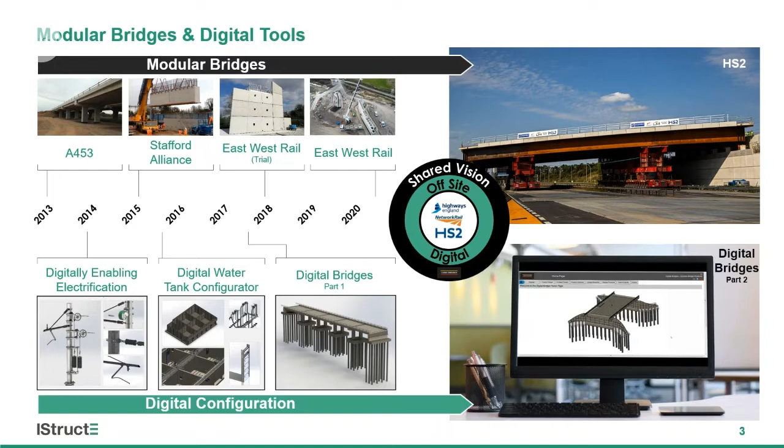I'll take you through the case studies around the products, and John will then take you through the evolution of our digital toolset, digital configuration tools. So firstly, let's start with A453.

We raised the question of how do we build these bridges using an offsite approach? How do we design the bridges so they can be manufactured and assembled efficiently and safely? We knew precast bridge beams and steel girders were already in the marketplace at the time, so we focused our attention on which other parts of the bridge structure could be manufactured offsite. We worked with Tony Gee and Partners at the time to develop solutions for the precast piers and crossheads you can see on the screen, but we also looked at solutions for offsite manufactured abutments. We developed a system which I'll hopefully be able to play a quick video to show you.

So we developed a system where we were utilising precast shells for the outer faces of the abutment. We would place those on top of the completed pile cap, where the projecting reinforcement was coming through from the starter bars. We'd then place and fix the reinforcement in the centre of the wall before placing the end closures and front face panels, so we were actually pouring an in-situ core down the centre of that wall. Each of those panels then had a joint that was sealed with a wet grout solution. That was the overall construction sequence.

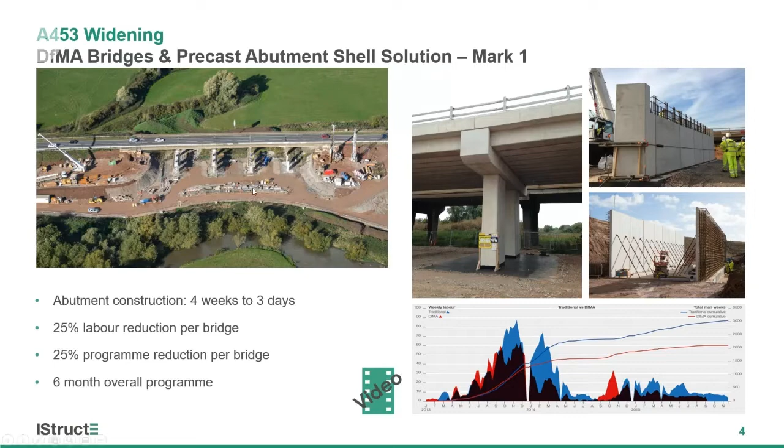So we were in a place of thinking this is going in the right direction. We then moved on to our next project, taking the lessons learned with us from the A453, and we continued to develop our abutment solutions for that project. This was working with the Stafford Alliance, which included Atkins as the designer, Network Rail, and Volker Rail for the main rail systems.

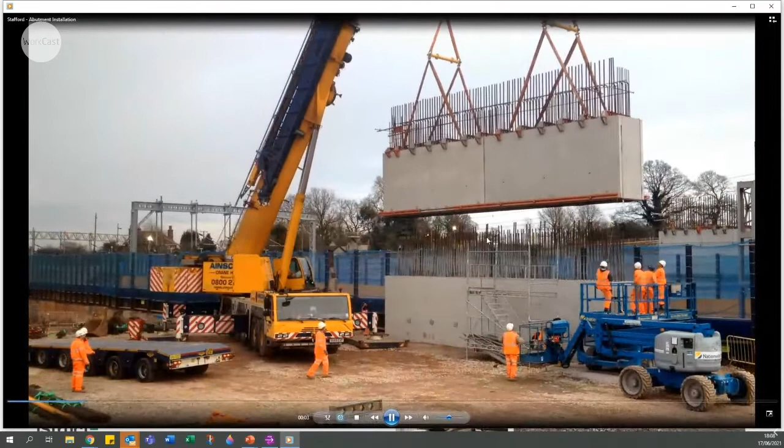We looked at how you take the methodology we developed with the precast shells and panels on the first project and turn that into something we could utilize in pre-assembly areas. So rather than bringing the actual precast panels to the work front, we brought the precast panels and reinforcement to a pre-assembly area. We pre-assembled them into a 3D module, into a lifting frame, and then lowered that into site.

Sorry, that video just clicked away. But you can see the precast shells being lowered into position. And so that was working for not only the bridges that cross the mainline railway, but also some of the smaller bridges that were involved in river diversions.

You'll see the images down the centre of the screen, in the bottom right, of one of the smaller bridges. It used exactly the same methodology, but we delivered that bridge in a week. So from completion of piles to concreting the deck, that was a week's worth of construction.

So we knew things were working at both scales, and we were onto something that was a system effectively. Interestingly, on this project, there were 6 bridges that we constructed using offsite methodology, but there were 5 bridges that, at the time when we looked at the rationale for delivering them, we decided to use a traditional approach. As it was perceived, they weren't on a critical path, and the programme benefit savings on offer for them wasn't worth going down that route.

However, things change on projects. Things don't go to plan, things move around. So suddenly those bridges did come on the critical path, and the feedback from our workforce was, why aren't we doing these in the same way as we did before? I think that was the first moment of us thinking there's a benefit to the wider application of this across a scheme as a system, and the benefits you get in reduced labour and workforce across a scheme deploying the same system. So that's the lessons learned we took away from that particular project.

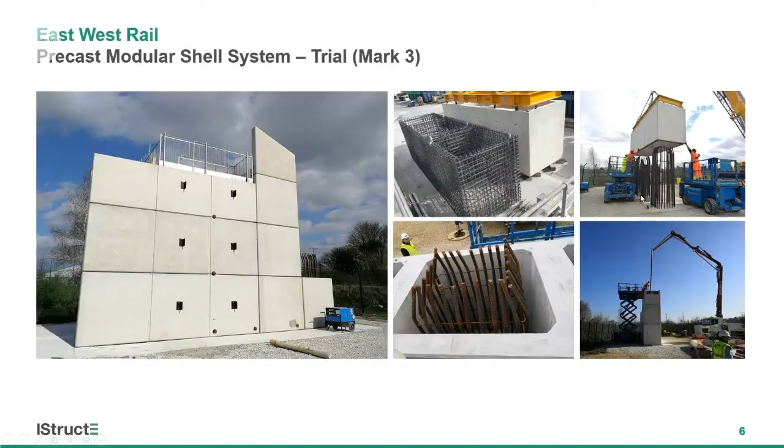So then I'm just going to go through a few slides of how that was then deployed on HS2 before I hand over to John.

Manufacturing offsite doesn't necessarily mean things are efficient to manufacture. One of the benefits of the modular system we've created is there's enough repetition across the bridges on a scheme, and the opportunity to deploy it across multiple bridges across the wider industry, that it helps to justify the investment in the manufacturing process and the molds and things. Whereas if you're just doing one-off bespoke casting, you've got a different business case to deal with.

John will talk more about how we've walked through the journey of developing products that we can then maximize the different number of configurations with a minimum number of products, to generate efficiency in standardization and manufacturing.

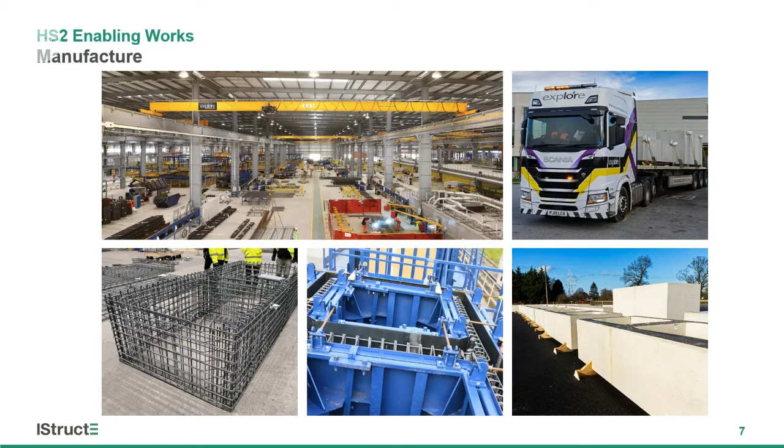Moving on to site, there's a lot of learning we've done around what level of control you need to put in place to control the tolerances of the on-site activities, which normally have a lot of play in them because a wet and cold environment can often be difficult to achieve, versus the really tightly controlled tolerances of our offsite manufactured precast components.

As part of this process, we've developed jigs and frames that allow us to control the tolerance better than would normally be achievable. That extra time on site, although it's seen as extra time you wouldn't normally spend, actually allows us to accelerate once we get out of the ground and into the assembly of the shells, and avoids clashes that would otherwise occur.

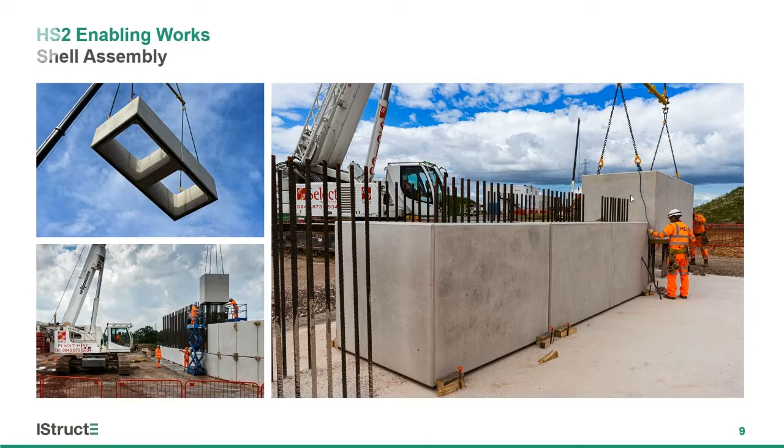Here you can see some of the shells going into place. There's a gasket on the bottom, similar to tunnel gaskets, designed to compress under the weight of the shell, so that when we pour the concrete to the full height of the abutments, we don't get grout leakage, and we also avoid follow-on activities for sealing joints with wet grout afterwards. That really releases the rapid construction assembly.

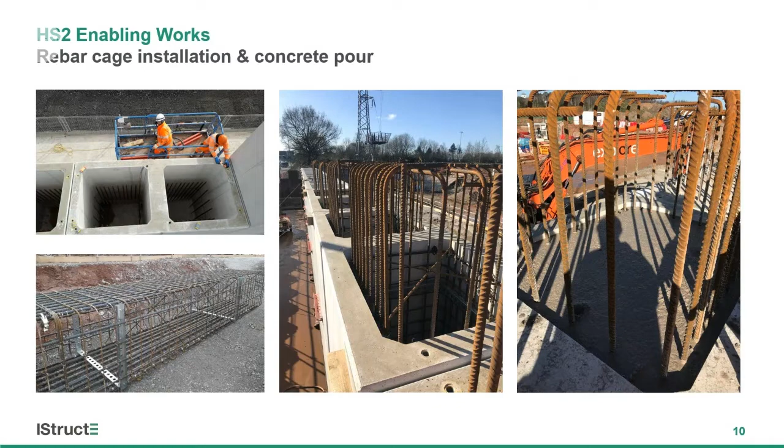Then we move on to installing the prefabricated column cages that sit within the shells, again using jigs and frames to control the tolerance so they slide inside the precast unit manufactured to a repeatable mold—so we know what the geometry is—while also avoiding clashes with the starter bars set out in the bottom, which you can see inside the shells from the pile cap. So all the time we're thinking about how to control the tolerances between our on-site and off-site activities.

Once the abutments and wing walls are complete, we've then got a connection of our L walls on top that help form the wing walls. These have been developed with a range of slopes to suit the different earthwork profiles that might be required.

Moving finally to the elements of construction still in situ, we've tried to standardize and simplify the most complex activities on site. The diaphragms themselves are normally an area with a lot of complexity, dense reinforcement, and a lot of carpentry and formwork involved. The benefit of the shells is the depth they provide, which gives us enough space to sensibly construct the diaphragm.

We've got precast fascia infills that sit between the beams to form the front face closure panel of the diaphragm for when we're pouring the concrete—you can just see the end closure on the left hand side there. Again, that takes a bit more effort in placement of the beams to make sure that when you're offering up the precast elements between them afterwards, it fits nice and snugly, without a great big joint to seal. But it can be done, and that's the sort of thinking and effort required.

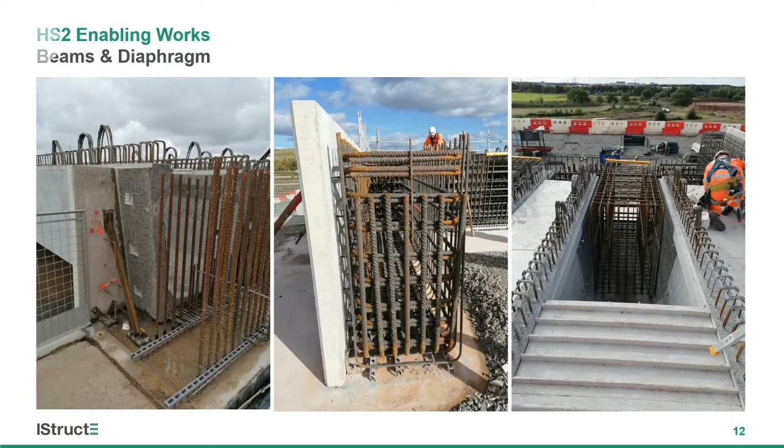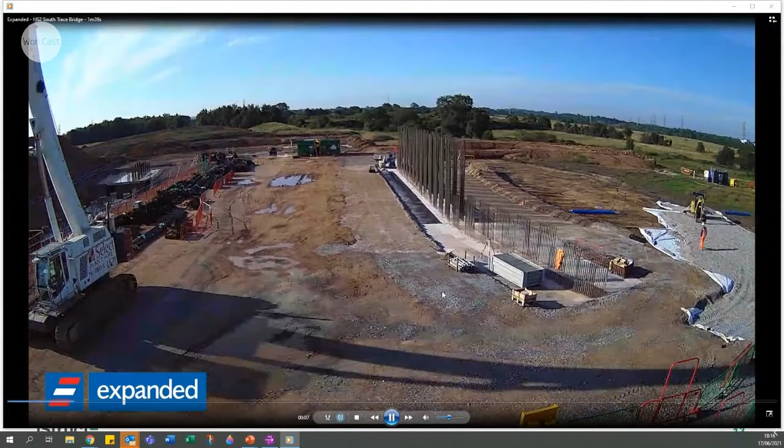And then to bring that to life, we've got a video clip of the actual abutment all coming together. So you'll see here, it's more of an assembly site, not a construction site in its traditional sense. You can see the starter bars projecting from the pile caps, and the precast elements being lowered into place.

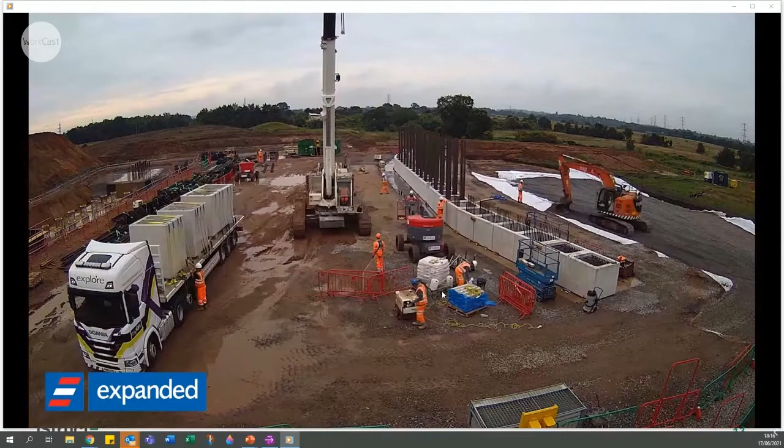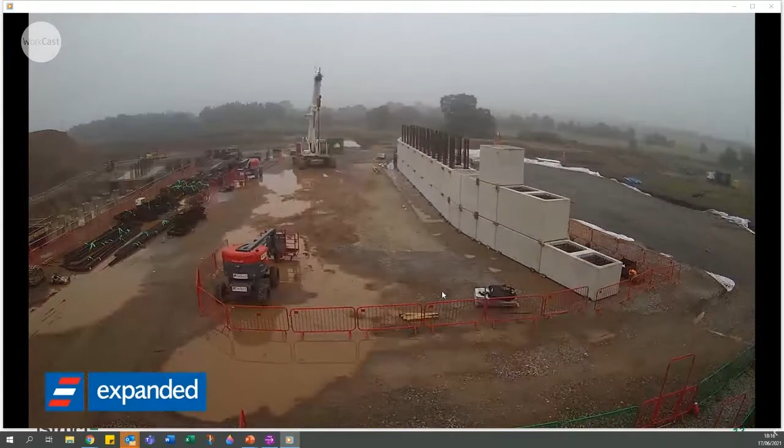There's a team of 6 that assembled this abutment. This was 400 square meters of abutment in 5 days of construction, including placing the shells, dropping the rebar cages in, and completing the in-situ concreting works. The team of 6 are multi-skilled bridge assembly teams, rather than having carpenters and steel fixers with different resource demands for each bridge, we use multi-skilled teams that can do all of the jobs rather than just their individual trades.

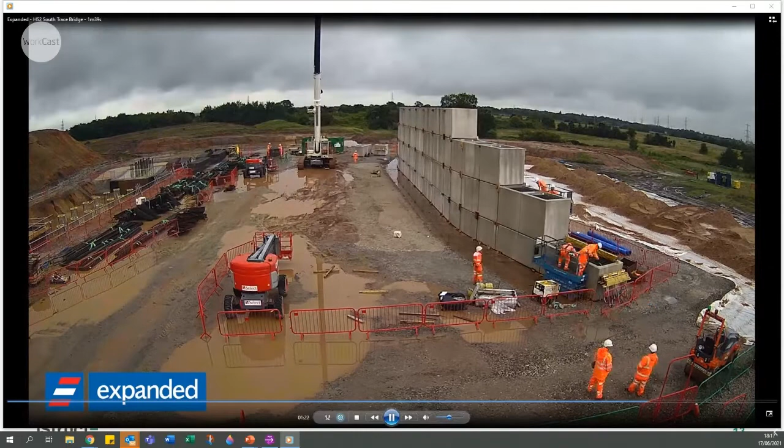You can see the cages ready to be installed and lowered into the cores, and we should eventually start to see the concrete being poured. You can see it's a relatively tidy site compared to what would normally be construction. We're able to still achieve the same rates of productivity during wet days on site as dry days. Because it's a simple, repeatable process, we can do this safely, reducing the risk of accidents.

So I'll close that, and just give you a summary of the benefits: the abutment was assembled in 1 week rather than constructed in 7. When you're working at prelims of maybe £200,000 a week or more on some of these schemes, there's potential for substantial savings across the scheme.

Overall, we're finding that compared to traditional methods, we're around 50% of the construction time for an entire bridge. There's 6 people on site for 1 week, rather than a team we estimate at 12 for 7 weeks on a traditional abutment.

We've got the benefits of fewer resources on site, fewer site cabins, setup and facilities for the team, which feeds into our carbon calculation in terms of the potential carbon saving when you're running off diesel generators with large office setups to support large teams. That's part of that carbon calculation, along with the embodied carbon within the concrete itself.

The ability to have precast shells means we can have a higher cement replacement in the in-situ core concrete, because we're not trying to get the concrete to go off quickly so we can strike the shutters and remove all the temporary works. So that's an increase in GGBS, and hopefully at some point moving towards a cement-free solution, working with client bases on what departures we need to get approved.

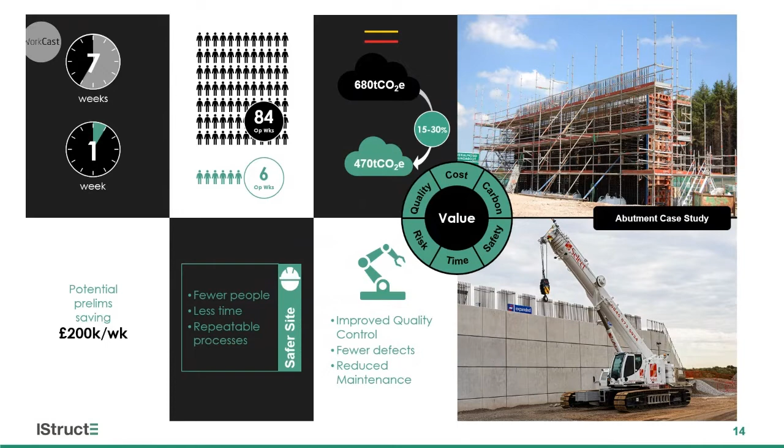Hopefully that gives you a feel for what we've developed in the product sense. And I'll now hand over to John to talk through the digital tools we've developed as a team to help drive this approach across many projects in the future to come.

Good, yeah. So one of the challenges of this type of construction at an early stage is there's quite a lot going on in terms of component selection. It's about how we assist engineers at the early feasibility stage of a project to understand whether it's feasible to go down this component, product-led approach.

About 2 years ago we started a project funded through Highways England and Innovate UK, with Laing O'Rourke and BBA for assurance, and from the design side, Ramboll and WSP working in parallel, us having been the designers on the HS2 bridges. What we're looking for here is a product-led approach, pre-approved components so there's confidence in the system, very much around engineering-driven decisions, looking for as much automation of the process as possible, generating design outputs quickly, and having design informed by cost rather than just costing the design we've got.

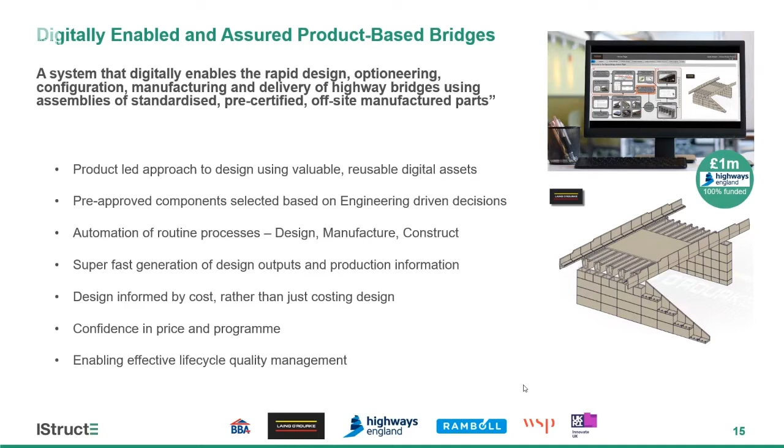So what we had to do was pick something we could limit this down to, a structural form that we knew we could do. So, leading on from HS2, we had a single span integral bridge with full height abutments, pre-stressed precast concrete beams, and the precast shells.

Through that, we're taking the process of HAPAS certification to get the assurance, which is where BBA are involved. We've got an approved installer scheme, a design guide, and an installation manual. The aim is that at the end of this process you've got design validation, a design that an engineer can be confident can be taken to the next stage and developed further at detailed design. We want a 3D model that can be used in preparing the deliverables for the scheme, an AIP and drawings, and also all the data needed for cost validation.

So where do we start on this? Well, obviously early on you've got some key decisions you need to take about constraining the extent of this task. One of the big things is getting all the experience in the room together. What was really important was to have the contractor, the designer, the precasters, and the installers all working together. From this, we had various discussions over the range of parameters we'd need to look at to get this to work.

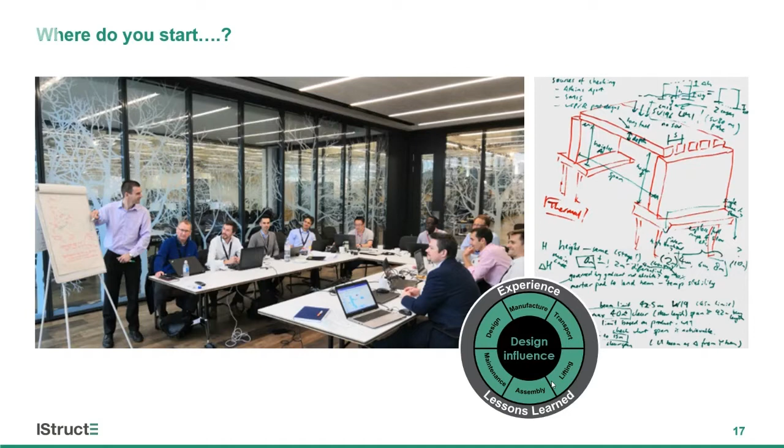We were very much aiming for realistic bridge configurations, ones reflected in the bridge stock in the UK that's going to be built in the next couple of years. Also conscious that we needed to maximise the data set we were going to achieve, but also make it achievable given run times for analysis. A big part of this was actually defining components and getting a common understanding of whether we were all talking the same language on span, abutment heights, that sort of thing.

So what we ended up doing was making engineering-based decisions, looking at this from a global perspective, but also from a local perspective. On the global perspective, we want engineers to have the confidence that if they generate a bridge configuration through this tool, it's something capable of being developed at the next stage of design. One of the problems with integral bridges is there's a lot of soil structural interaction going on - they're not easy things to design.

So what we did was look at a number of ranges here. We've got span up to 40 meters, skews up to 30 degrees, various abutment heights, and also a categorization of ground condition into hard, medium, and soft. Very basic, but at an early stage in the scheme you might only have some very basic information on ground conditions because the GI hasn't taken place yet.

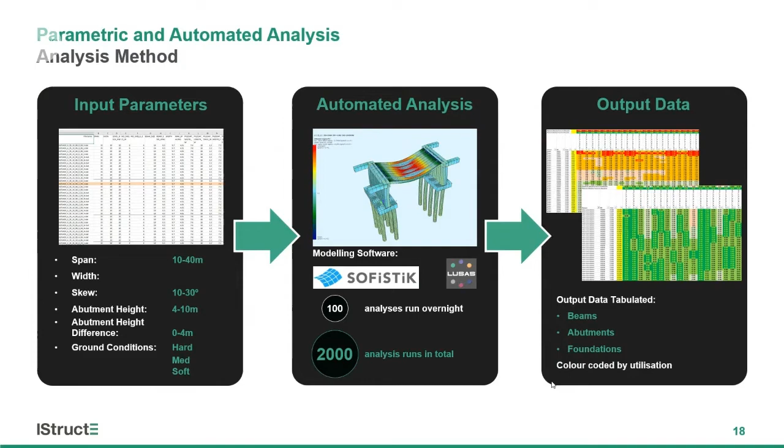We're then running multiple analyses in SOFiSTiK and LUSAS to generate the data, numerous data sets, so that an engineer can see the data relevant to the bridge they're selecting and understand how heavily the various components are being utilized. This shows the output from the SOFiSTiK model that we used. Obviously WSP used a LUSAS one in parallel so that we're cross-checking against each other.

Through here, we've got a single data file that's been used to generate what is effectively a detailed design model. But with just changing one number in the inputs, you'll then change that from a 10 degree to a 30 degree skew.

We're then selecting out the key sections which constrain the design at this point. Otherwise the runtime was going up from around 15 minutes to 4 hours, and we couldn't live with that. But from this we're generating the data we need, with a degree of confidence that later on we have run the key load cases that are going to be considered.

And one of the other things we wanted to do through this was actually calibrate what we were doing against the HS2 bridge that Phil showed earlier.

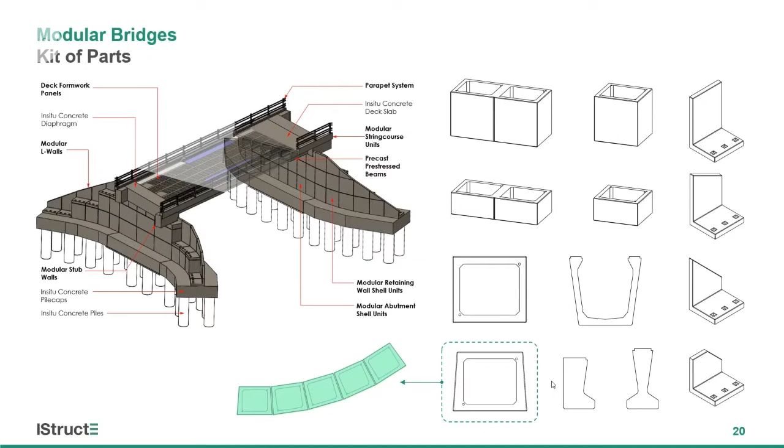We're then looking at assembling all the product components into the configurations, and again we're looking to maximize the number of configurations, but with a minimum number of products. You can see in green at the bottom, there's quite a useful component there that can be used to put a curve into the wing walls, which is quite nice, but was also very important for us on HS2 to get an angle of 15 degrees back for the train impact case.

What comes out the back of that is a design guide, which is intended to be used by experienced bridge engineers, but to answer those questions that people would have using the system.

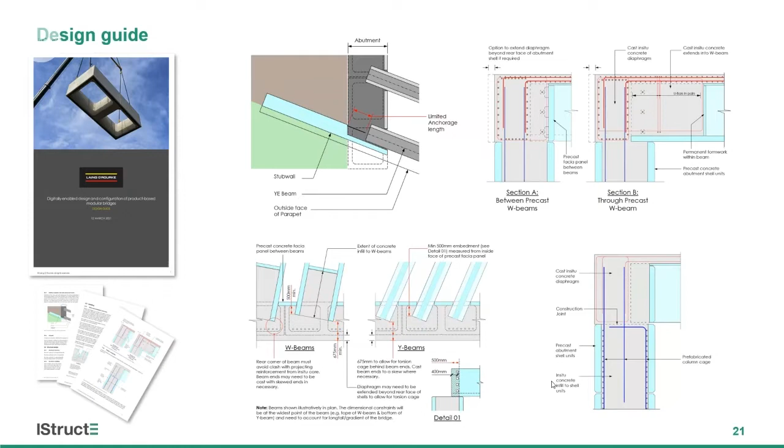Into this we had a lot of decisions around the local rules. How much should beams be embedded into the abutments? How long should a stub wall be to enable you to pick up the ground lines and carry the loading from both parapet impacts and also the integral bridge pressures on a skewed structure? So a lot of rules were generated through that.

And then finally, to input into the configuration tool, we need to again define clearly the data that we're looking for. So we've got a data input sheet that actually enables someone to list out the parameters they want looked at for a particular bridge structure - heights, abutment types, and that sort of thing.

So finally we end up with a configured model, as you can see on the left, which is a 3D model that can be exported out to IFC. That's developed - the Laing O'Rourke team have done that using a SolidWorks-based platform. And that exports out to a drawing at the top, which can be used as the basis for an AIP drawing or an options report.

It does actually generate a template AIP as well with the key data and key analysis methodology already imported into that, and also there's a set of cost data.

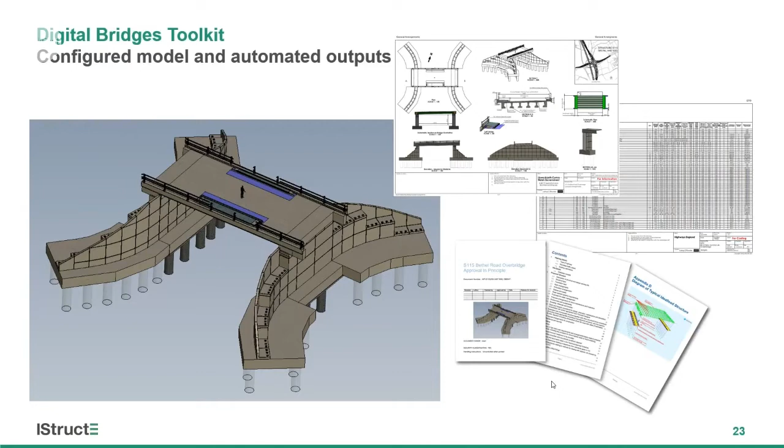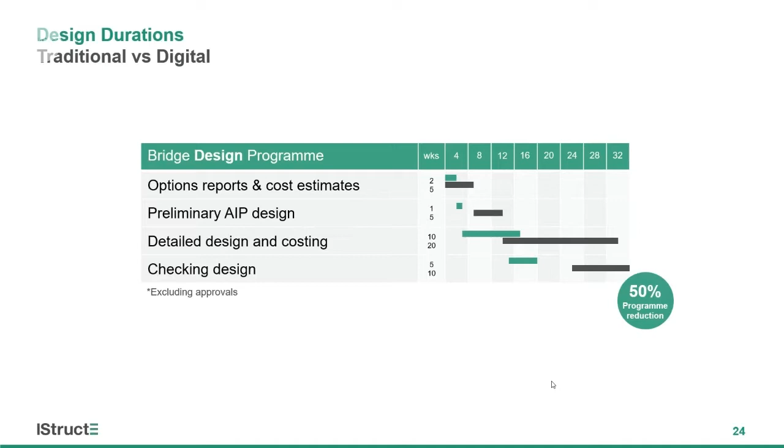And finally, on to design program. We're anticipating some quite significant savings in design for this, not least through the use of more standard analysis models, but also just from the common process, common methods of detailing, common methods of doing things, and that should yield a good process.

And so we just do a final comparison of traditional against product-led. One of the issues we've seen on the traditional process is you try and shoehorn modularization into the process at a later stage - it's quite difficult to do that. You're very often too far down the line to make the best use of the components.

Whereas if you take the product-led approach at the start of design and then understand how you can then adapt that, we can have different spans, different skews, but we can use the components to generate different structures. We can then select how that works.

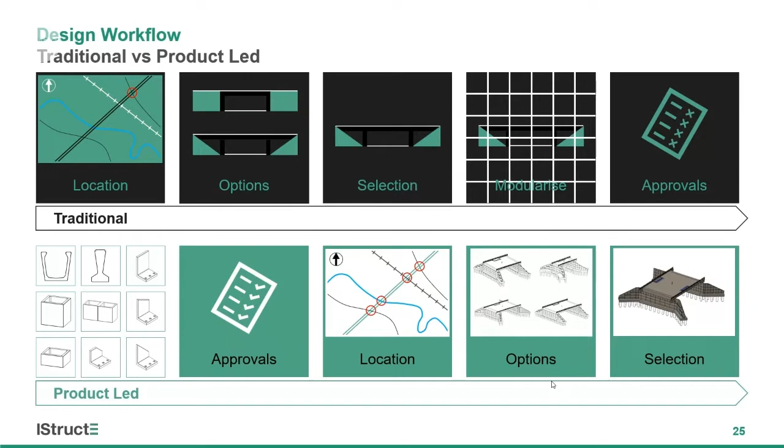And I think Phil's got a short video just to show - it's about 2 minutes - just to show the process, if that's okay. Yeah, right. So just to finish on.

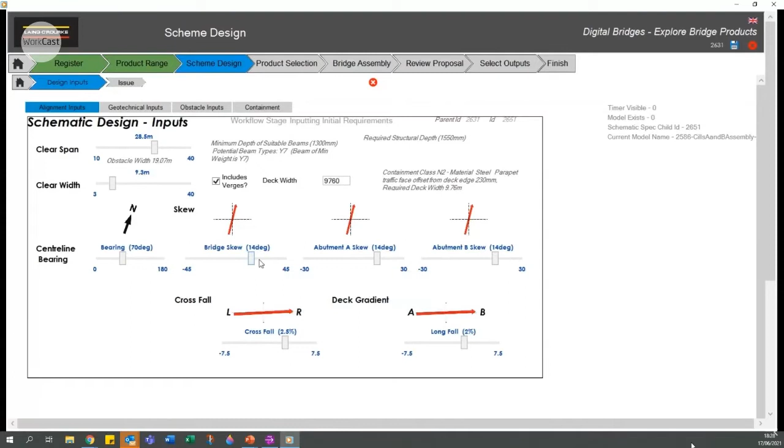So this is basically a speeded up run through of inputting information into the tool. So providing your information about who you are and what project it is, providing things around the geometry of the bridge in terms of skews and spans, looking at the obstacle and what you're trying to cross and the relationship with the bridge to it, and then getting an output to just check that you've input that information correctly and you've interpreted the drop downs correctly, so you're seeing what you're configuring.

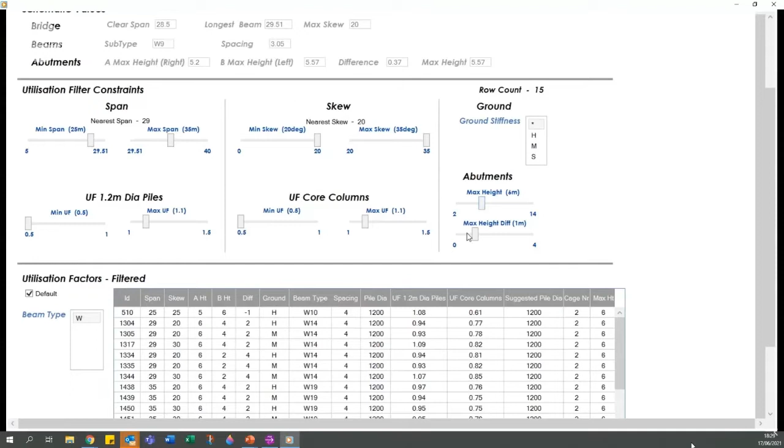Then selecting beams, then getting feedback on how hard the structure's working. Like John said, those 2,000 bits of data in there can be filtered to then see which is the closest fit to your bridge and see how hard it's working.

Again, the level of detail building all the time. Then we're just checking to see that information's come through from the schematic stage of decisions before we start loading in the actual components into the model.

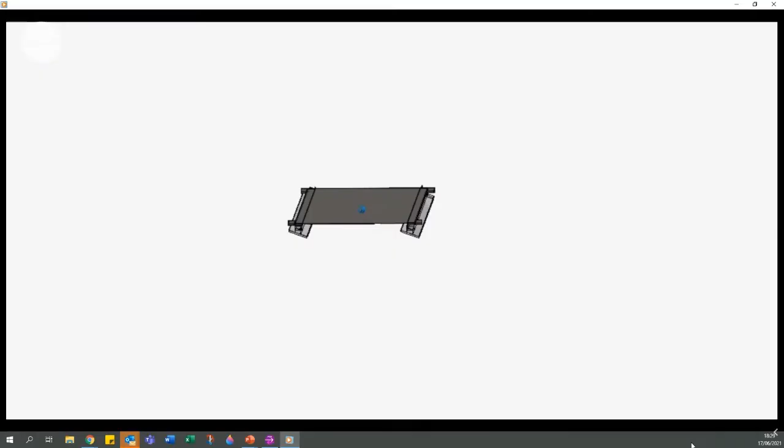So we can see, rather than just being the space savers, we're now starting to bring in the actual deck. We're bringing in the beams themselves and the diaphragm. It's a view here showing the beams with the infill concrete at the ends, the permanent formwork in between the beams.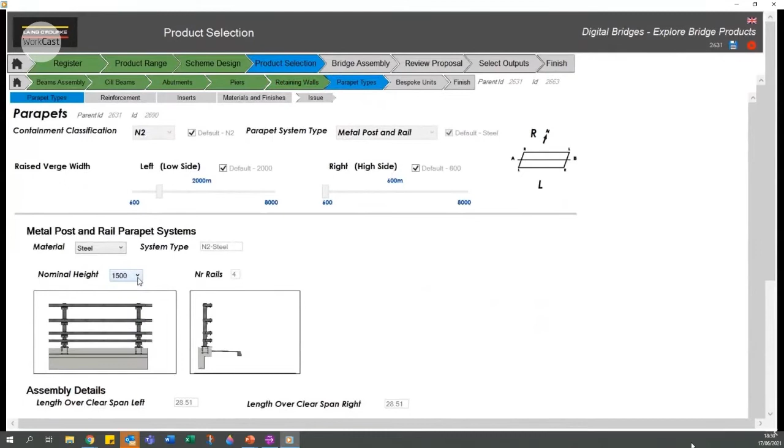And then similarly, again, making decisions about foundation layouts and the requirements for parapets and different heights of parapet or different containment requirements, before we then get to a completed bridge, automated from the decisions that we've made within the tool.

So really quick run through. I appreciate that's a quick fly through, but you can see that the level of detail within the model is not just an IFC sort of volumetric model. It's right down to nuts and bolts level of detail.

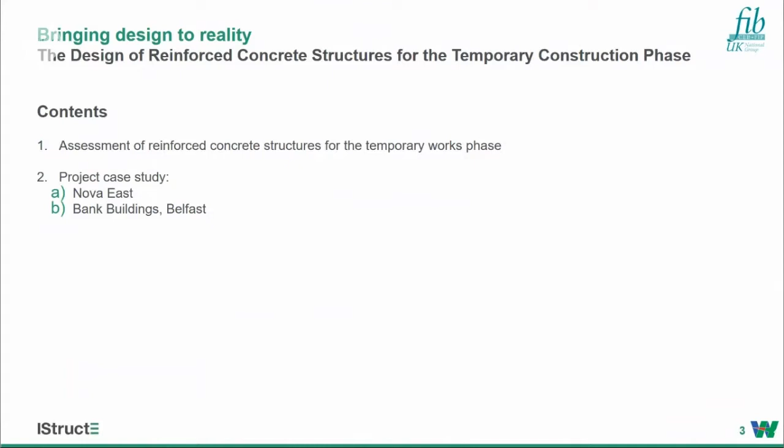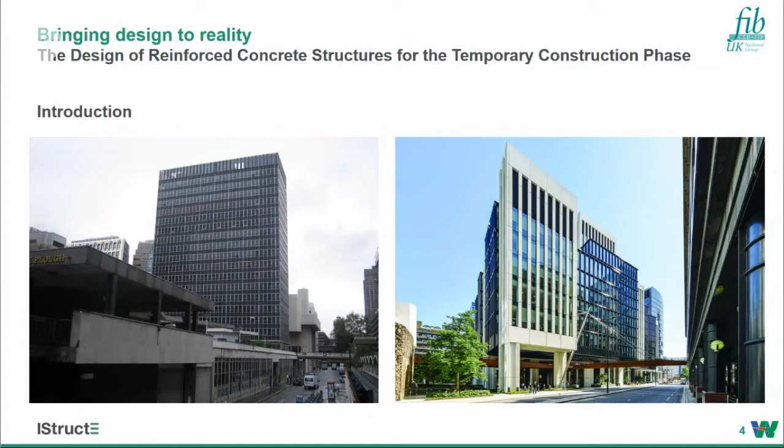That just gives you an example of what we generally see more and more, whether it be demolition or partially restrained structures - we see that more commonly in everyday life. More and more projects involve a lot of basement excavations, which will allow the superstructure to follow through.

So almost starting at the beginning of any project with regards to demolition, one of the first temporary works you come across is floor load tests. Whilst we ask for investigations to be carried out on site to verify thicknesses of the slabs and the reinforcement content, what you generally find quite hard to prove is the bending and shear capacities of the slabs, proving it to a capacity that allows you to put a substantial size excavator on top, which helps with your programme in terms of demolition.

So one of the first things we normally do is floor load tests, where you take a typical bay and test it to certain loads of machines that will be used, to determine its behaviour. One of the quite significant challenges and main things to be mindful of is flat slabs that you generally come across. So I'd always advise doing calculations to justify that and generally propping those areas before any load testing.

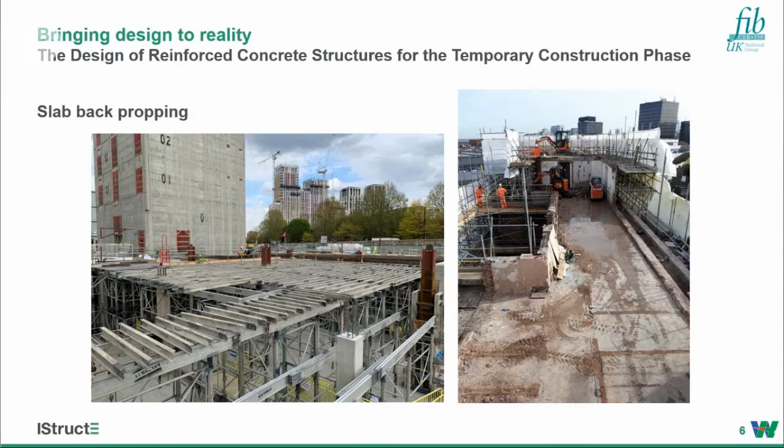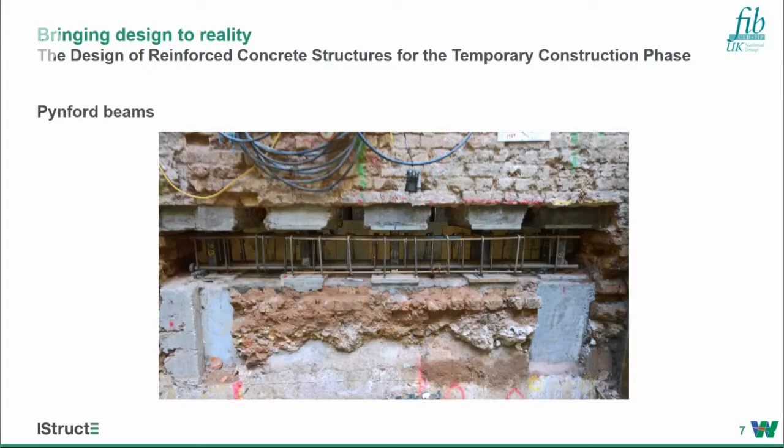Generally, when the existing building is demolished, especially in and around London, there's quite a lot of buildings which contain a single-story basement. Other temporary works elements you come across are propping of the existing basement walls - depending on what the new structure is or the scope of works, you either generally prop down onto the B1 slab, or if there's follow-on works for the piling contractor to install a new secant or contiguous box, they're founded onto thrust blocks.

Moving on throughout that project life cycle, it's not uncommon to find a new basement within an existing basement. There are several ways these can be constructed - whether you look at bottom up basement construction, where secant or contiguous piles are installed, and effectively trying to get those designed for that temporary condition, allowing you to prop at the top of the cap and beam, so you're getting that permanent works cap and beam acting in temporary conditions to allow it to span between props.

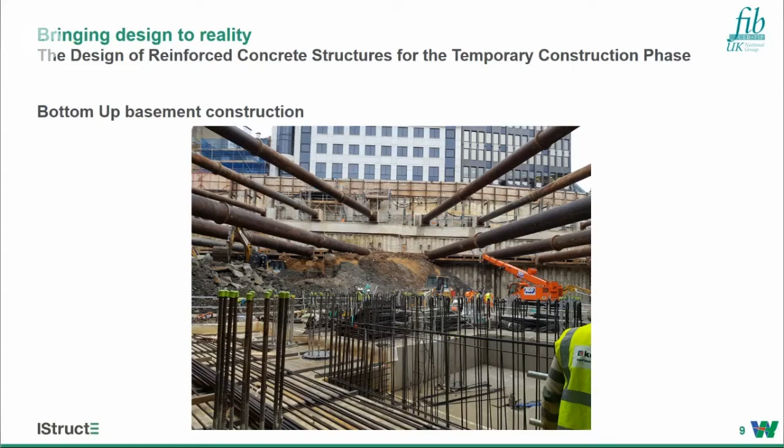What's quite useful as well is to form blisters and corbels above cap beams, which allows the permanent slab to be cast up against the cap beam, and then you allow your props to be removed after, which aids the removal of the prop sequence. When you design those contiguous and secant piles, you design them for that temporary phase, to allow them to excavate down to B2, or whether you have to introduce intermediate propping throughout.

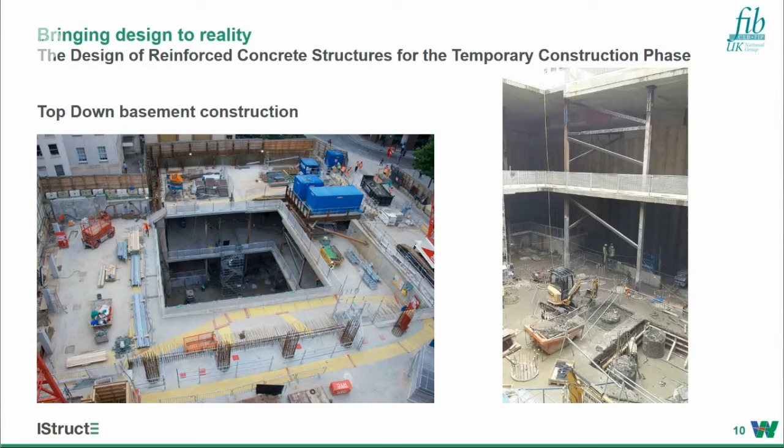It's not uncommon to use these permanent slabs as gantries, really. Depending on the basement excavation phase, as you get down to your new B2 or B3, one good thing that a lot of contractors like to do as early as possible is erect the tower crane, which can help move material in and around site. So it's about how much of that new basement slab needs to be constructed and what additional reinforcement is required in that area, just to allow your tower crane to be constructed, which is very useful to get your project going.

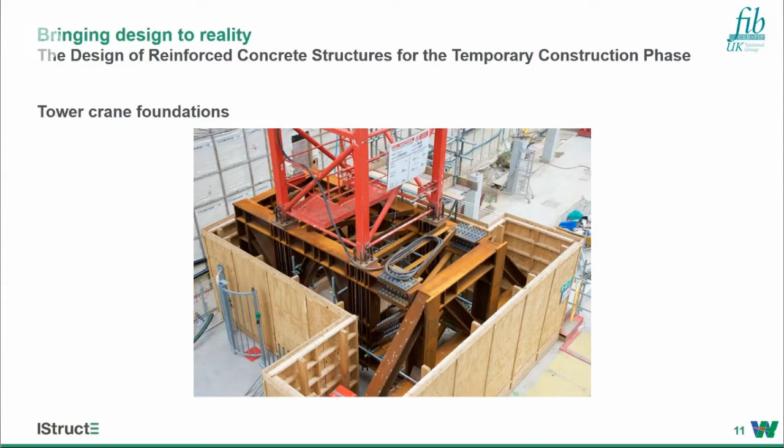Once you're down and building out the ground, getting your superstructure out, you look at the general core stability, whether in the form of slip form and jump forms, generally assessing these in the temporary condition, because in the permanent condition these cores are all supported by the slabs at all the different levels. Depending on the height of the new building, it's how much of the core can be constructed in advance of lobby slabs or permanent slabs joining into the new core. And what you generally see is another tower crane erected on top of the core, so it's checking that in the whole temporary condition.

So what I'll do now is pass you on to my colleague Ioannis, and he'll take you through a couple of case studies of these being in application.

Good afternoon, all. So we will move from the general view of temporary works to more specific cases. One case is the Nova East project, where we, along with house partners, were the temporary works designers for Keltbray, which was the contractor of the early stages.

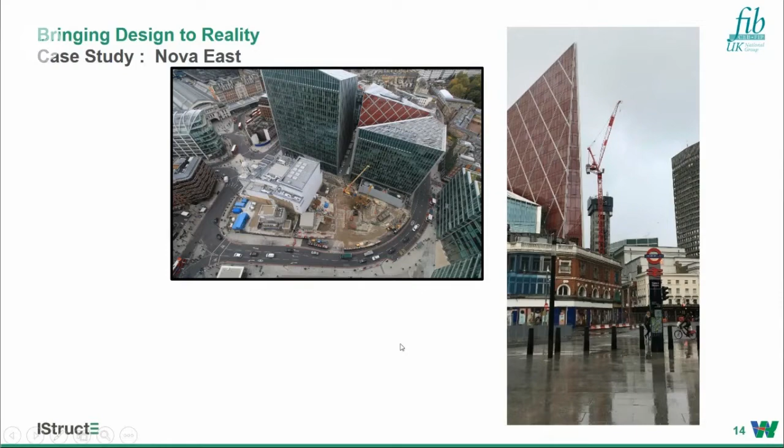This is our team here. The place is just south of Buckingham Palace, near Victoria Palace Theatre. We can see that the specifics of this plot is that it was a very congested plot, and had a lot of underlying LUL and Thames Water assets.

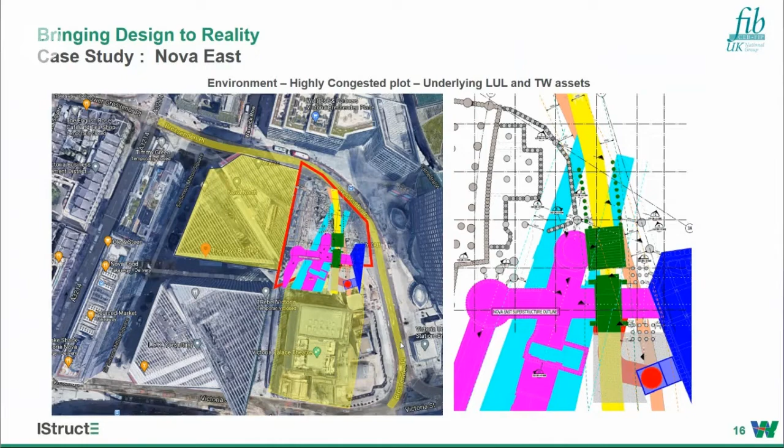So they had the King's Scholars' Pond sewer, for example, passing through. All of the permanent work was designed around the underlying assets, and this was the main constraint of building up the building. So just to have an idea of the underlying assets that were the constraints of the site.

The building is an 18-story building overlying 3 basement floors, and it was built around the underlying assets. The main characteristic of the building was that a large part of it was supported on these capping beams, and there was a very big pile cap that was actually cantilevering to support essentially the complete building.

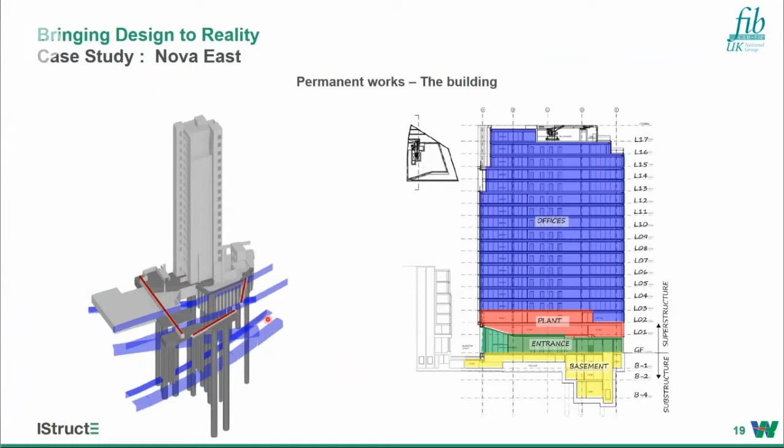So in plan, we had a partial deep basement. The rest of the building had a more shallow basement, and that is the basement 1 level, which is almost in the middle of the excavation.

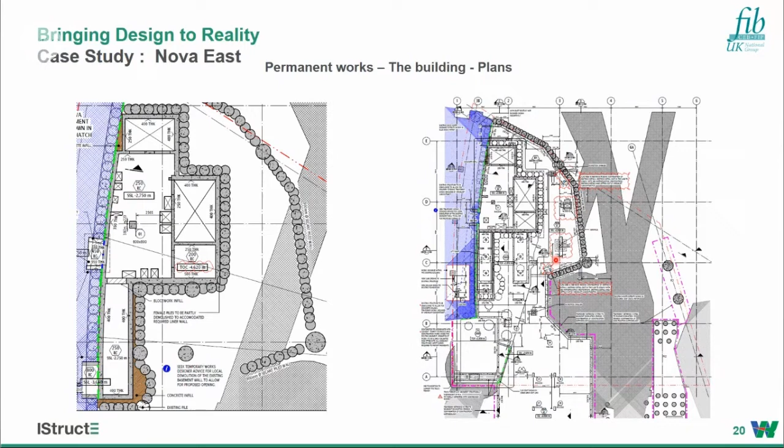So just an overview of the elements that in a typical project we would design, considering the construction element - the permanent construction elements that have to be designed also have to be checked for the temporary case. This includes the bearing piles and the retaining wall piles.

In that case, the pile cantilever slab, the capping beam, the first level retaining props, the capping beam at the lower level, the second level retaining props. There was an excavation gantry. All of these are putting the permanent works in different load cases.

The construction of the temporary case of the pile cap with the tower crane on top, bearing piles, another pile cap. Then, of course, is the 75-meter high core stability with a tower crane on top of it, and then all the excavation and enabling works to enable the construction of the shallow basement.

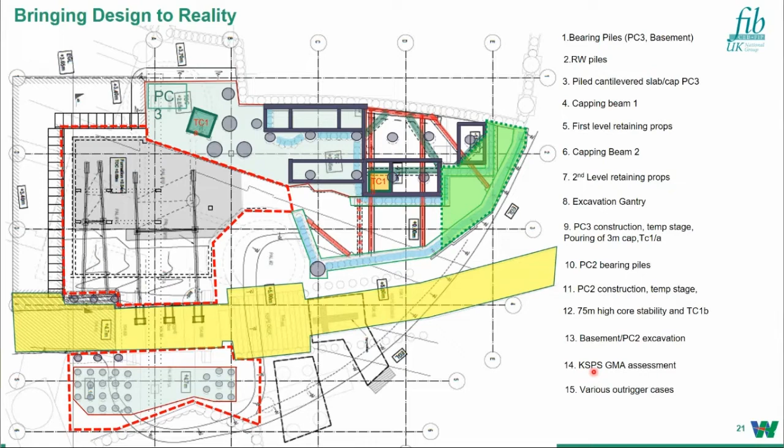Of course, all of this has to come along with an assessment of the KSPS sewer that is affected by the construction sequence of all these assets, and various outrigger cases to facilitate the construction. So we will see 4 of those designs a little bit more detailed.

So the pile cap 3, which was named for the specific project, had 2 cases in plan. The first part was going to be cast, and then the second one, the tower crane would be on top. So in the first stage, the tower crane had to be fully functioning, and because of the nature of the pile cap, this was designed to be a 3-meter deep cantilever pile cap.

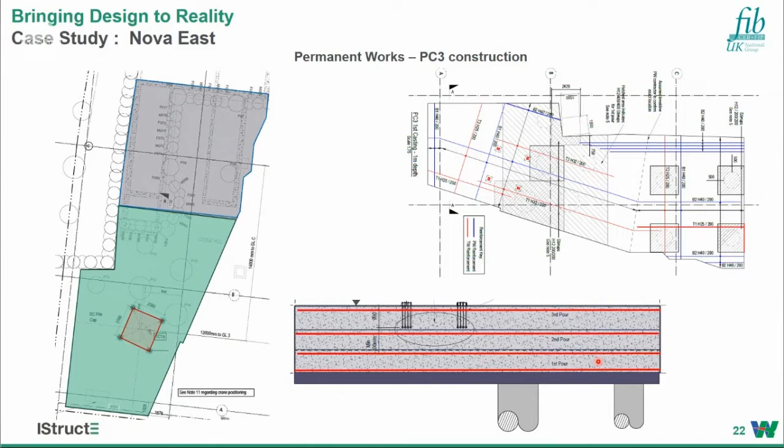So there are specific aspects that are included in this case, for example, the sequence of the pour. You need to design the temporary case for the 3 different pours. So in each of these stages, separate temporary works and separate temporary reinforcement have to be designed for the functionality of the pile cap.

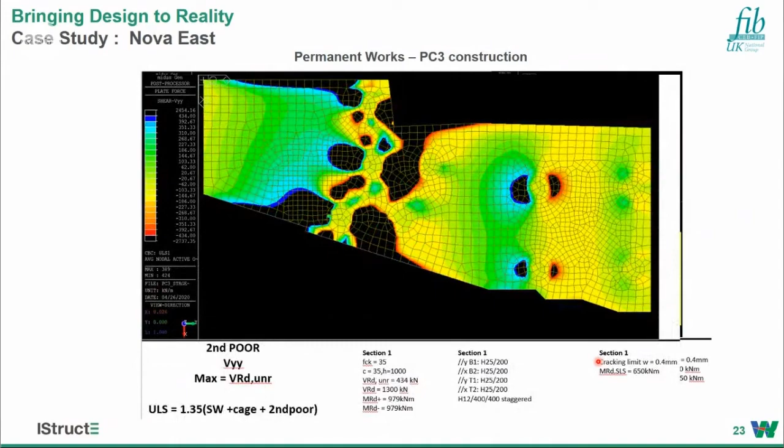And then we put on top the tower crane that started to service the site. Of course, we designed all of this in all the stages that were involved, against cracking, shear, and moment.

Another specific problem that arises in such structures is the stability of the cage, which is also a high risk element. So in this particular construction, we had to deliver detailed designs of the cage, as we had 12 layers of reinforcement on the top. We went down to the detailed design of the tie detail option, and of course we designed the cage for stability.

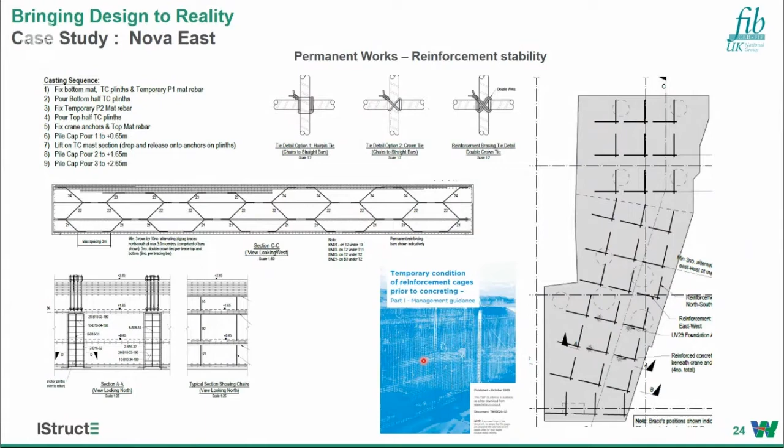Because that was going to be built completely from the top, rising 3 meters high, it also had a lot of hazards and health and safety issues. The temporary condition for the reinforcement cage - the Temporary Works Forum has been issuing some guidance, which you might want to have a look into.

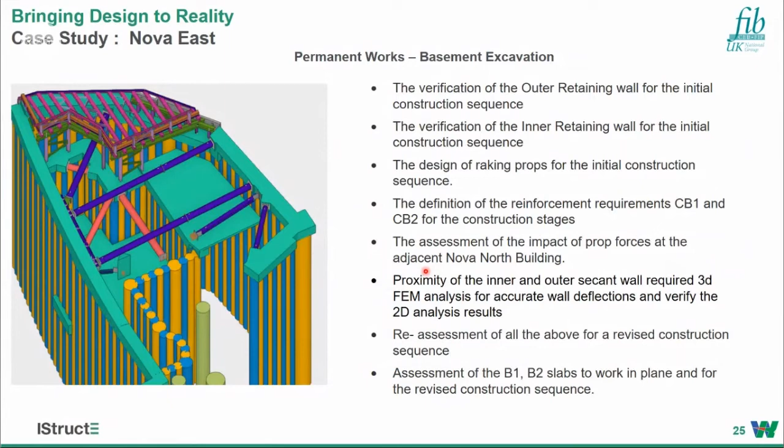The permanent works, of course, the basement excavation. You can see here on the left the complexity of the basement during construction and the temporary case. A typical sequence in this case was installation of the piles, excavation, installation of the first strut, further excavation, installation of the second strut against the second level capping beam, then down to the formation level, and then construction of the permanent works.

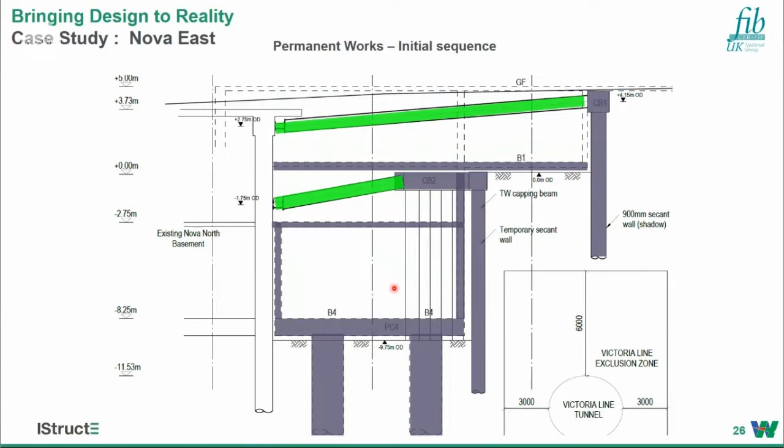So in this case, the initial design was to install the B1 slab, basement 1 slab, before removing the strut below that, which changed eventually.

Of course, we considered all the interaction of the soil and the structure, and we had some alluvium at the high levels, which is quite an onerous condition, and all the deflections had to be limited to 0.2% according to the specifications.

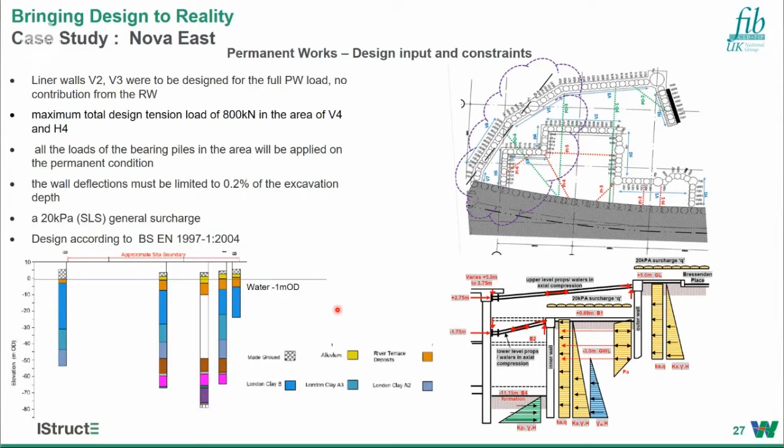In most of these cases, we design for at least 20 kPa general surcharge to accommodate the plant working on the side of the excavation. We checked the design in 2D and 3D to have as exact as possible deflection assessments and total displacements. And then, as almost always happens, construction sequences change, as I told you before.

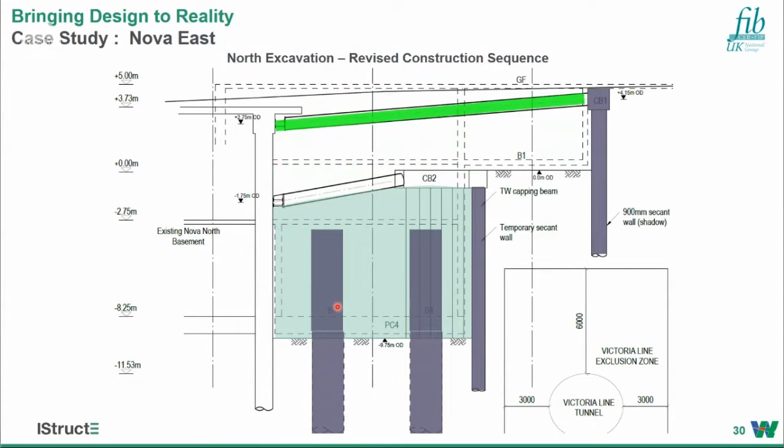The contractor decided, because there was a health and safety issue of hot works in a confined area, to remove the props and change the construction sequence, requesting from us to evaluate the condition of removing the strut just after the B2 slab.

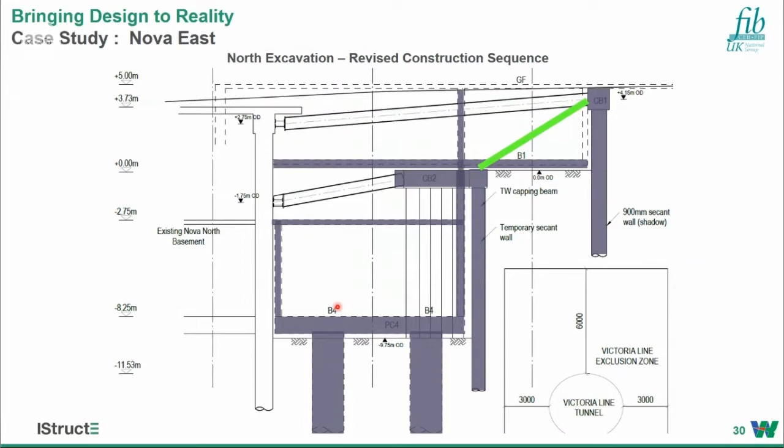That changed a lot the sequence and the conditions and the loads that the permanent works were to be exerted in the temporary condition, so we had to model the complete structure in order to evaluate if the two slabs for those cases can work as a strut in plan, and transfer the loads safely while being maintained within the specification and the requirements.

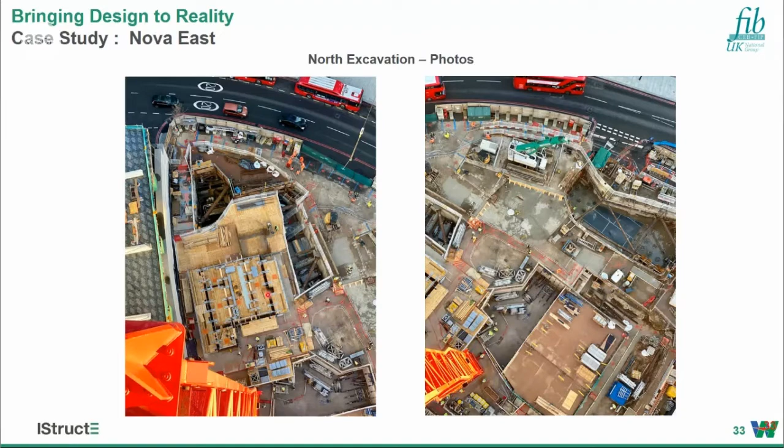Of course, we did the analysis and assessment of the in-plane compression stresses, and that is an overview of the site with the construction, showing the start of the construction of the core. Here is a picture of the site with the gantry, and the core has just started.

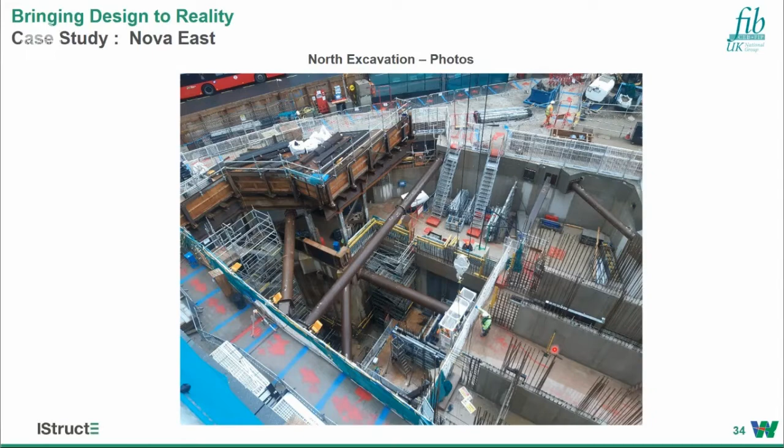Half of the core is going into the deep basement, and the rest of the core is founded on top of the big pile cap. The core assessment - the temporary stability of the core - is always a consideration in this kind of structure.

Just to give an overview of the problem we have in these cases: for this specific core, it's a 75-meter core. It has to stay 6 months without the surrounding framework advancing, because then the second contractor will have to come and build up the steel framework.

The core should be designed also to accommodate the full working tower crane on top, and it will be constructed with slipform formwork, and the slipform would have to advance 6 floors ahead of the construction of the lobby slabs, which is always the case. Of course, there are design assumptions and ULS and SLS check requirements according to the Eurocodes and the serviceability control checks.

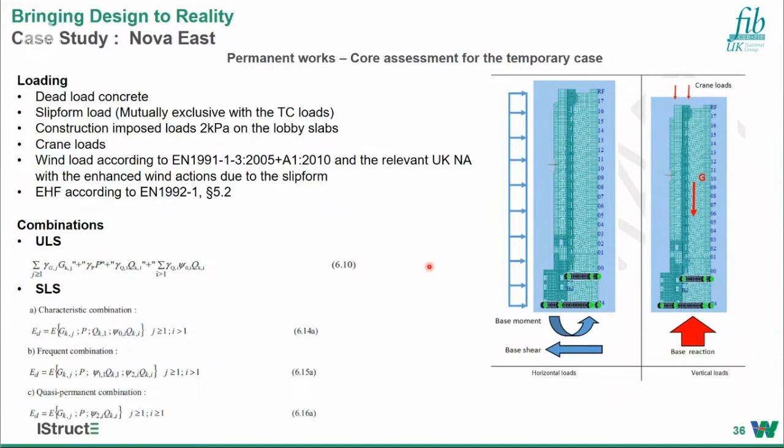The loading, if we break it down in those cases, you usually have the dead load, the slipform load which is mutually exclusive with the tower crane loads, the construction loads imposed on the lobby slabs once these are constructed, the crane loads, the wind loads, and of course the equivalent horizontal loads. These are also applied to the core at different construction stages that have to be evaluated.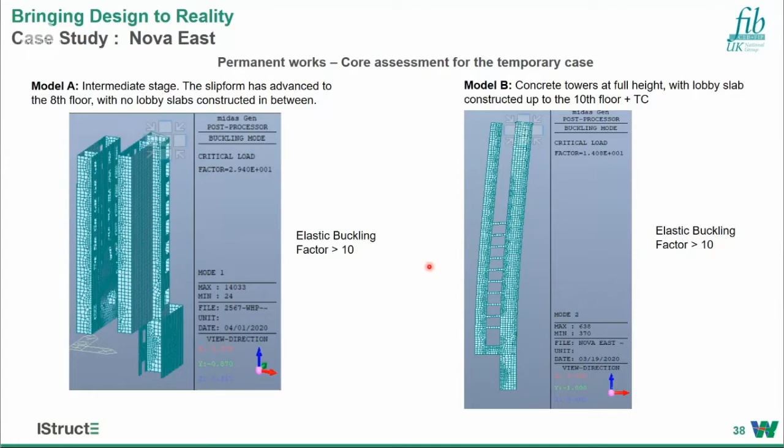So we apply the loads for different cases, and we need also to assess the core in terms of buckling for the two intermediate stages, because the contractor prefers the lobby slabs, and it's almost the case that the lobby slabs are following the advancing of the slip form, which is much faster. Full analysis on the core in order to evaluate and design the temporary reinforcement requirements for those cases.

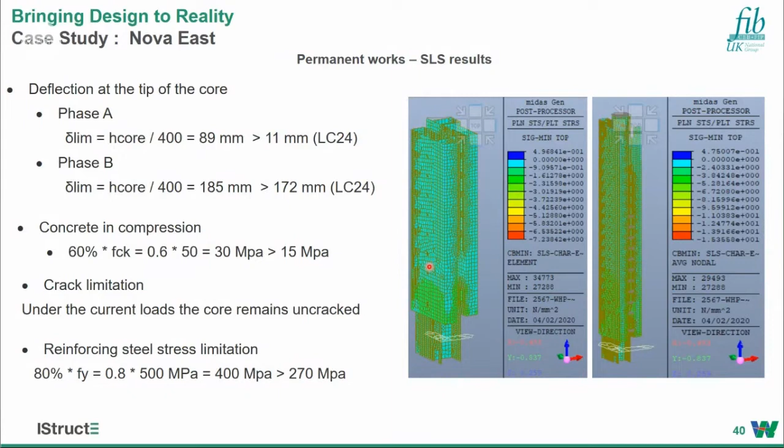Of course, evaluation of the serviceability results and the deflection, the concrete in compression, and the crack limitation that was defined by the permanent works designer. This is an overview of the core.

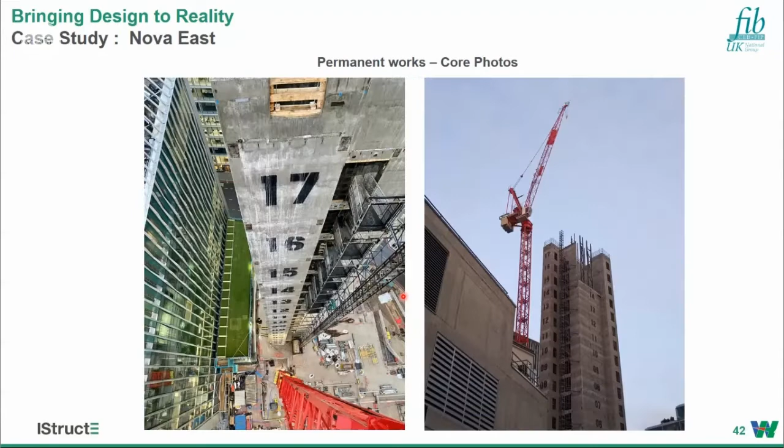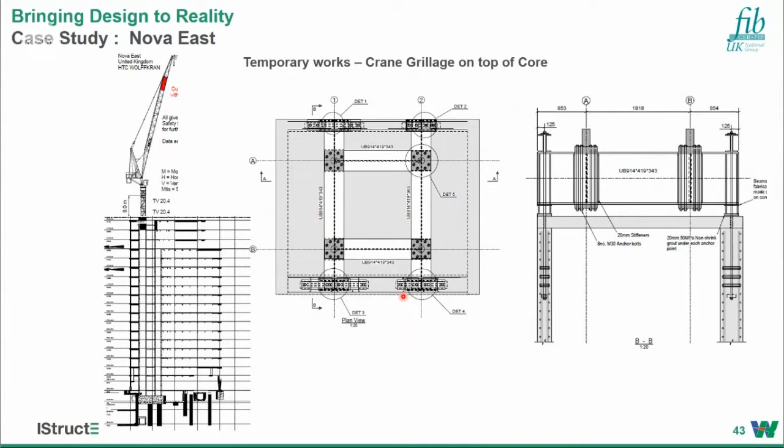Just before we had the tower crane on the top, which is a special case. The tower crane on the top is something common for high-rise buildings. You can have assemblies with 8 or 4 supports on the core. For the design of this type of structure, someone can use the CIRIA 761 guide, which is the tower crane foundation and tie design. It has examples for these cases.

Of course, the worst load cases come from a 360 degrees problem. Apart from the design of the main steel members and the connections, what is of interest in our presentation is the connection design to the core, which in that case, a special requirement was made for the precast core cap to be in place before the installation of the temporary crane. That, of course, increased the upstand distance here, which makes things a little bit more onerous.

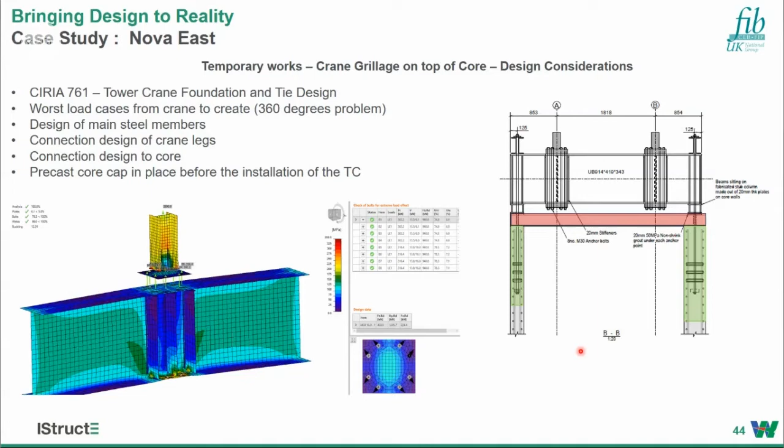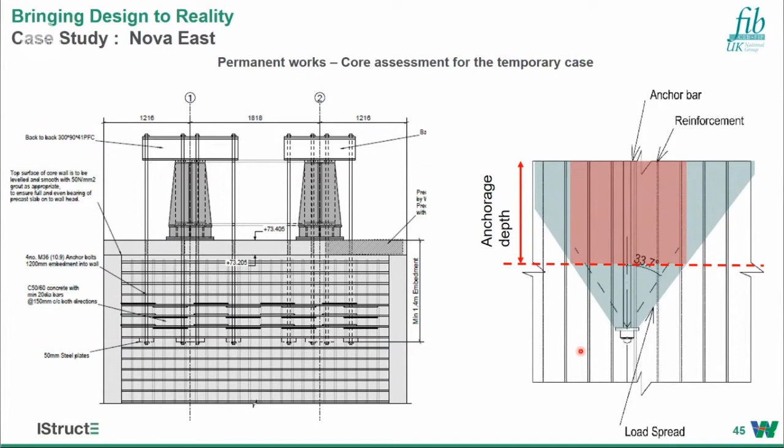In that case, we designed the tower crane anchor to transfer the load through lapping on the existing reinforcement of the core at the top. Therefore, the reinforcement of the core at the top, the crown if we can say it like that, has to be completely redesigned in order to undertake those loads through the lapping. And of course, special considerations have to be made for bursting loads and allowable stresses in the concrete and anti-bursting reinforcement around the cores.

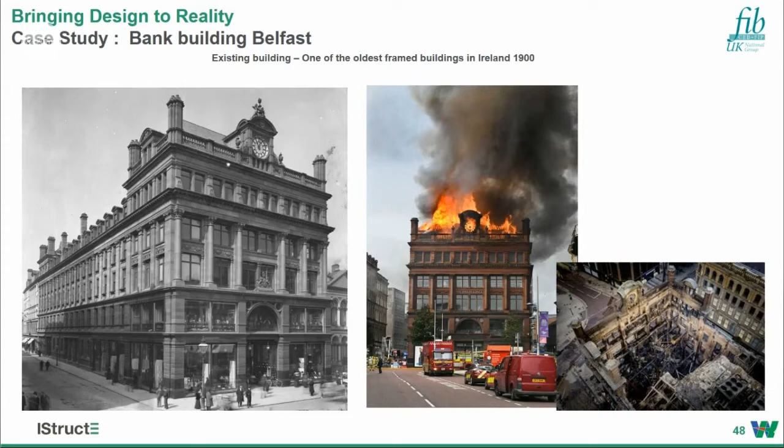The Bank Building Belfast is an example that will show us that some constructions are dictated by totally different constraints than someone has when designing a permanent structure. This was one of the oldest frame buildings in Ireland, early 1900s, masonry walls, iron steel frame, and it underwent a significant fire at the end of August 2018, which burned the building from top to ground.

The challenge here was that since the building was burned, it was a very big health and safety hazard for the public, and at the same time, to make the building secure after the disaster, a significant part of the center of Belfast had to be closed down. So that had significant cost effects.

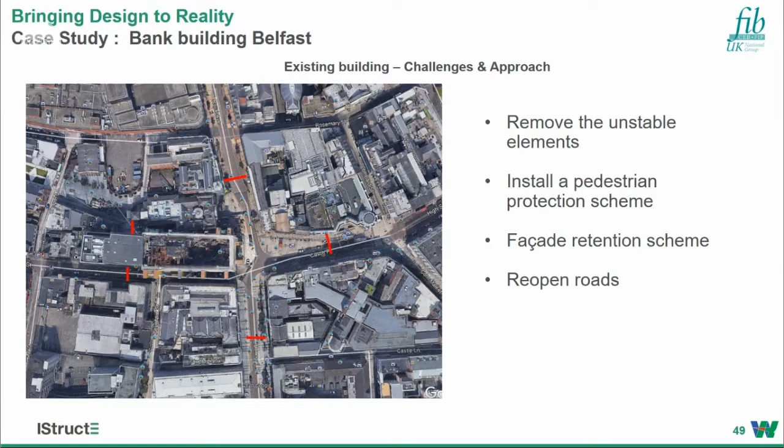So the challenge here was to make it safe as fast as possible, to remove the unstable elements, to install pedestrian protection, to build up the facade retention because it was a listed building, and to reopen the roads as fast as possible. Of course, in order to design the facade retention with the most efficient design, we did have a wind load model to define as exactly as possible the wind loads.

Which would bring us eventually to the design of the towers that supported the facade retention. In that case, since Belfast is a port city, there were a lot of containers around, loads, and lashing equipment. So we decided to innovate a simple modular structure made out of containers and backfill them for the ballast. Now the requirement here, the problem here, was the design of the foundation.

So the design of the foundation was on top of Belfast sleech, which is not just a good underlying soil. So we had to come up with a solution that would require less working hours of personnel working close to the dangerous building, and at the same time we would not be able to install a typical foundation for facade retention, which normally requires coupling micropiles working in tension and compression against the wind loads.

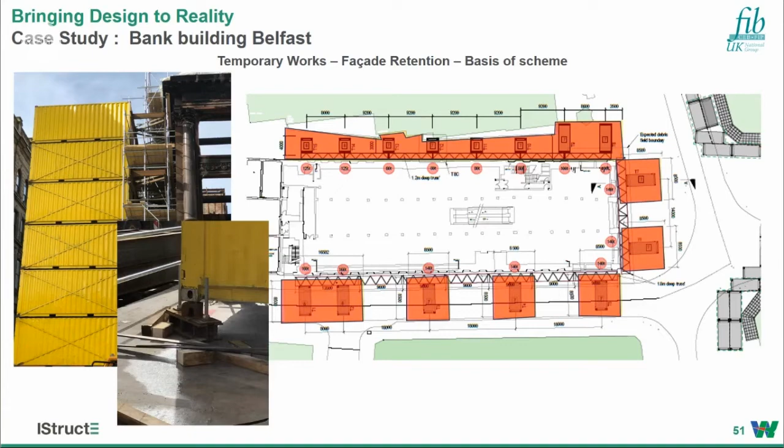So we ended up designing pad foundations with lock nuts on the pads, and we designed the foundation with fiber reinforced concrete without the reinforcement. In that case, we chose to use a little bit more advanced material with 35 kilograms per cubic meter of fibers. We also had to consider the settlement of the pad foundations onto the ground, and not allow large deformation on the surfaces. That followed CPT tests around the facade and extensive analysis for settlement.

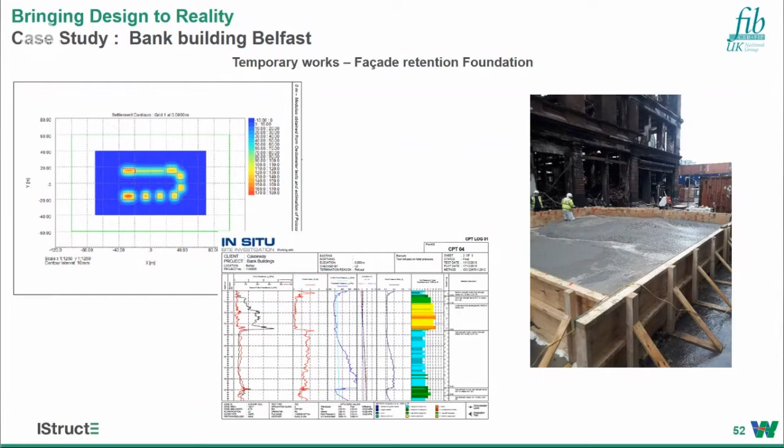That is an overview of the project with the towers and the foundations. We were fortunate enough to have the Thomas Telford Premium Prize for our paper on forensic engineering, for whoever wants to look at the other aspects of the project apart from the foundation. We also had the award of the Temporary Works Initiative of the British Construction Industry Awards. Thank you very much.

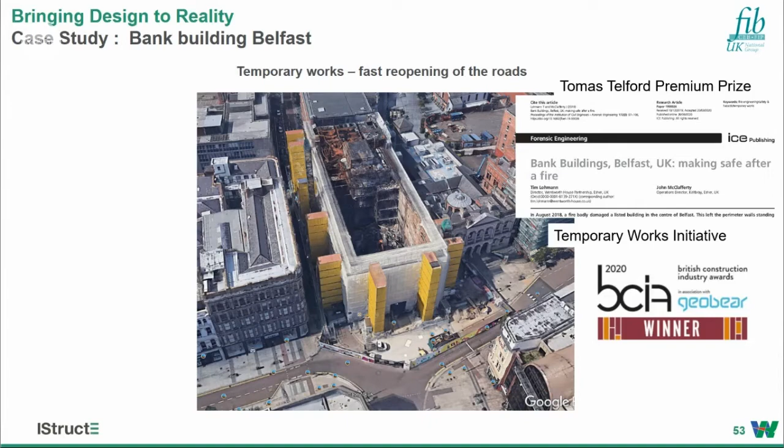Well, thank you very much, David and Ioannis. I think some really great examples of where the temporary works design is much more complicated than the permanent works design. That's great.